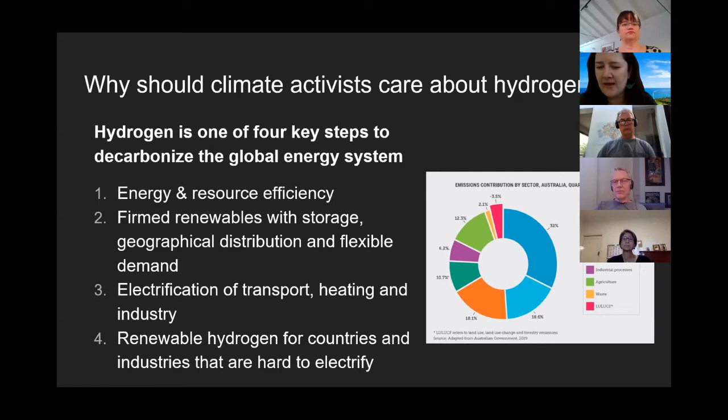For the countries and industries that are hard to electrify, renewable hydrogen is the thing that helps fill the gap, that gets us from anywhere between 60 to 85% renewable generation across total energy to 100% renewables across total energy, which we actually talk about as 700% renewables. I'll get to that. So how is hydrogen made? Hydrogen is made in 3 different ways.

The biggest way it's made globally at the moment is through a process called steam reforming of methane, which is where they take gas, fossil gas, and they run it through a chemical process and catalyzer, and out comes hydrogen. The second process is using coal and stripping hydrogen out of coal to create pure hydrogen.

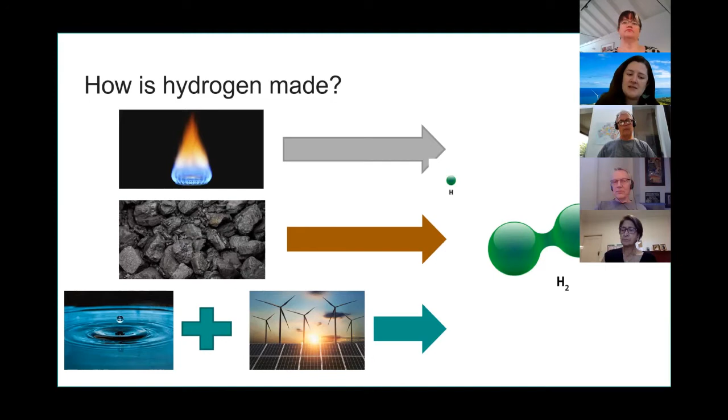And then the third type is renewable hydrogen. So using water and renewable electricity to split water into its constituent molecules, hydrogen and oxygen. And so the first 2 processes from coal and gas both produce greenhouse gas emissions, particularly carbon dioxide, in the process. So they are a polluting way of generating hydrogen. The electrolysis mechanism, which is where you use electricity to split water, if the electricity used is from renewable sources, is a 0 emission pathway to generate hydrogen.

So the thing to say about hydrogen is it's actually a very large global industry already. There's a lot of talk about how hydrogen is the big next thing. It's already a big existing thing. This is a report by Wood Mackenzie about a year ago, a global energy consulting firm.

And what it shows is that the global hydrogen industry that currently exists accounts for more carbon dioxide pollution than Germany, than the global shipping industry, than global aviation. So it's actually a big pollutant, and it accounts for about 1% of global greenhouse gas emissions. So only slightly less than Australia, in terms of our domestic emissions.

And what hydrogen is mainly used for at the moment is the synthesis of a chemical called ammonia, which is used in the production of fertilizer and explosives and a number of other processes and chemicals in the chemical industry. And in fact, ammonia is one of the top 10 most globally traded commodities worldwide. So it's actually a big industry. We just don't know very much about it because it's the feedstock industry rather than one that is a consumer facing industry.

Hydrogen is also used in the refining of oil. So we'll see the reduction in hydrogen use in that process as we start to electrify transport around the world and move away from petrol. And then it's also used in methanol production, which is, you know, if you have methylated spirits and you use that for cleaning your house or something like that. And there are a few other applications.

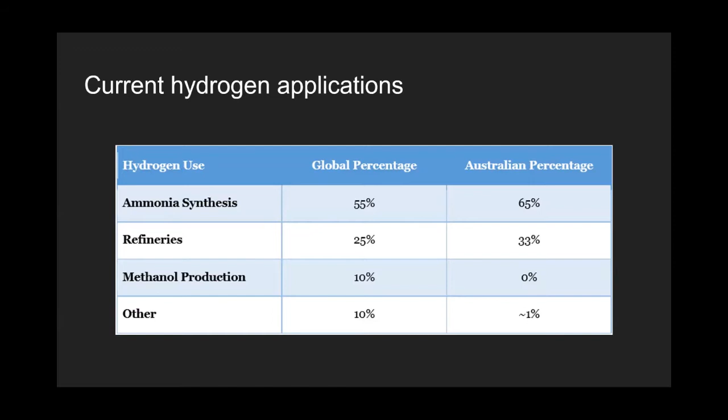So those are the existing applications of hydrogen that are happening worldwide and have been happening for decades, if not 100 years. But what are the potential applications of hydrogen? And this is where a lot of people get very excited, because hydrogen is quite a versatile potential fuel. Not only can it be used as a chemical feedstock to create ammonia, which is what it already is, it could potentially be used in heating processes.

It could be used for transport purposes, to power ships and trucks and trains, maybe even cars. It could be used as a form of storage that can be then burnt in converted gas peaking plant to help balance electricity when the wind isn't blowing and the sun isn't shining. We all know that we need storage, and it's essentially a form of storage.

And then, of course, it's an export opportunity for Australia. It could also be used in remote sites and a whole range of different applications. But I think one of the things that is important to note is that not all applications will be competitive from hydrogen. So currently, if I go back to this slide, steam reforming of methane, the gas pathway, is the most prevalent way we generate hydrogen globally. And at the moment, the renewable hydrogen pathway is a number of times more expensive than that gas pathway.

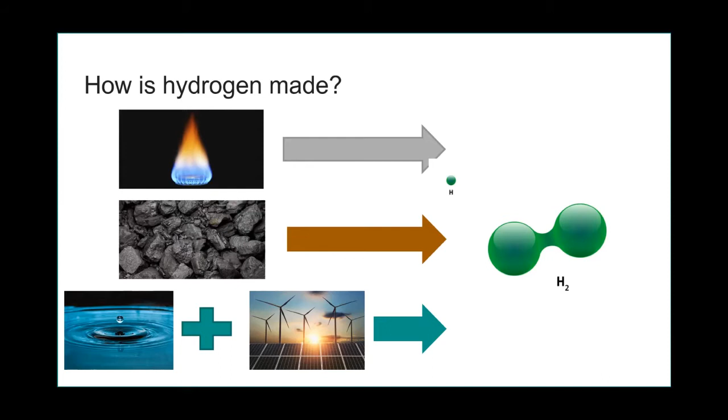So there are sort of two dimensions in which hydrogen is more nuanced than, say, transforming the electricity sector, where it's pretty easy. You go, we need to shut coal-fired power stations and replace them with renewables and storage. For hydrogen, you've got to first worry about how it's made, and then you need to think about, is hydrogen the most efficient application or solution to this particular decarbonisation challenge? So we've done some work evaluating the potential applications of hydrogen.

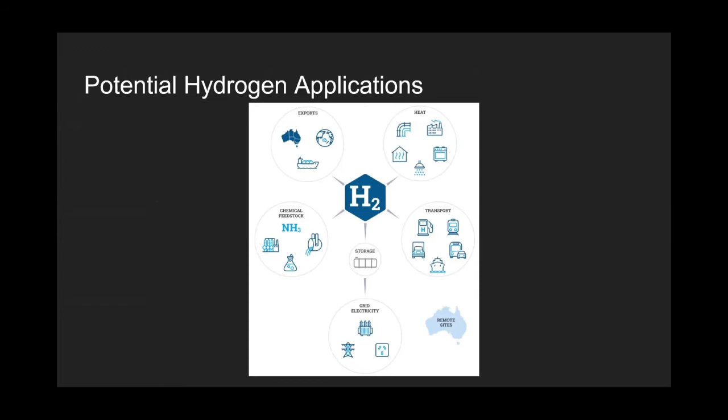And the questions that we ask: is the renewable hydrogen technology available for this use case soon? Or is it likely to be available in the long term? And that's really, does the technology for this sector exist? Does the technology to use hydrogen in ships, or export hydrogen, or use hydrogen in domestic appliances like your stovetop, does that technology exist now? And is it likely to exist in the future? That's the first question. It's a technical question. And then the second question, is an alternative zero carbon pathway likely to be more cost effective, functional and have less negative externalities?

So I'm just asking Nicky to unmute again. Hi everyone, sorry, my internet dropped out. Blame the NBN. Where did people hear up to? We probably only missed about 60 seconds. So if you go back to your share slides, we should be right. Okay.

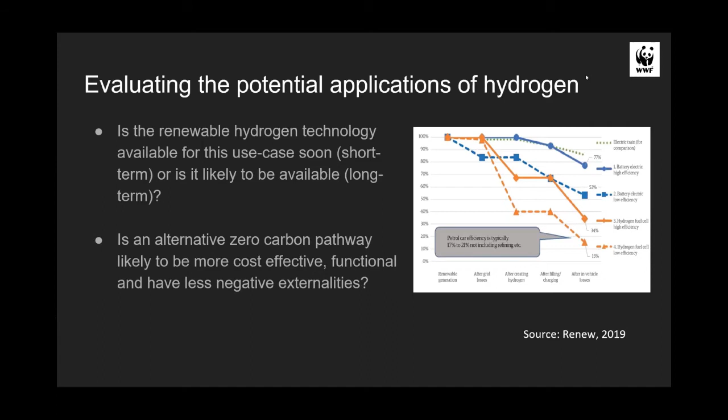So based on this analysis, we've identified 3 of the best long-term hydrogen opportunities and 3 of the best short-term hydrogen opportunities. So the first is in the production of green building materials.

So steel, for example, the steel production accounts for about 6 to 7% of global greenhouse gas emissions. And that's because in the making of steel, you use coking coal. And what we are seeing research and pilot projects show in places around the world is that you can replace coking coal with a hydrogen pathway. And so we're seeing some pilot projects in Sweden and in Germany.

And the question is, can Australia, as the world's leading exporter of iron ore, start to generate a green steel industry using our renewable hydrogen potential in Australia to generate and make green steel onshore? Similarly, alumina, so when we make aluminium, it's a 2-stage process. You refine bauxite, the raw mineral, into alumina, and then alumina into aluminium.

Now the aluminium path, the second part of that mainly uses electricity, and that's the part we know about. But the first part, we do some of that here in Australia, and that process requires very high temperature processes, and that will be quite difficult to electrify. And so renewable hydrogen could be a really good way of generating the heat that is needed to refine these metals and create these different green building materials.

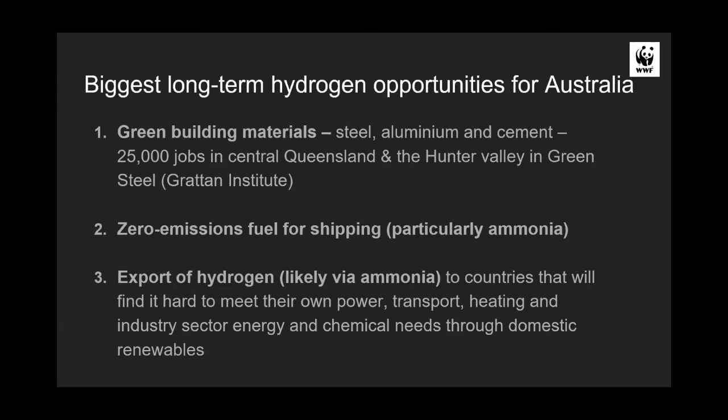But we're probably not going to see renewable hydrogen be cost competitive until 2030 or thereabouts, because we still need to bring the cost of both electrolyzers and renewables and electricity itself down the cost curve. Then the short-term market opportunities for us, they're really about how do you create the scale? How do you create the demand and the scale that will help bring renewable hydrogen down the cost curve and make it cost competitive?

So the first opportunity we see is through decarbonising the existing hydrogen applications, such as fertiliser and explosives. And one of the challenges here is there's quite a big cost differential for this application, but there is a big opportunity because the technology already exists. They already use hydrogen. It's not like they're converting from gas to hydrogen. They're just replacing one type of hydrogen with a zero emissions form of hydrogen.

The second is around heavy transport. We were talking to some financiers and they thought that there was quite a good opportunity to replace expensive diesel in remote mines and remote communities with renewable hydrogen, particularly where the renewables is excellent, which is in most of remote Australia.

And then the final area, and this is a little bit contentious, is around injection of hydrogen into the gas grid. Now, we don't want to see hydrogen used as an excuse to extend the life of the gas industry. So what we're saying is that we would only support this idea of injecting some renewable hydrogen into the gas grid if a state government was also pursuing significant electrification programs.

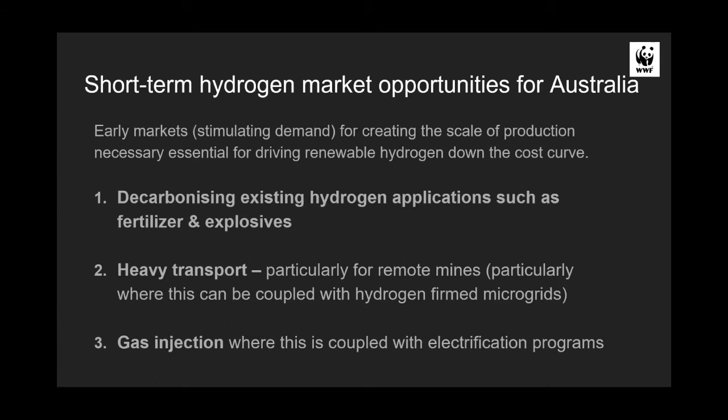Final few things that I want to say is, so let's talk about Australia's renewable advantage. We have some of the best renewable resources in the world. It's Australia, parts of Africa, Chile, and parts of the Western United States, where you have both amazing solar and wind resources, a bit of Western China as well. But we are one of the places that is, A, more accessible than some places, and B, we don't have a high population base and we have a large land mass.

So there is a huge opportunity that we can have to help decarbonise other countries. And if you look at Japan and South Korea, for example, which are two of our largest fossil fuel trading partners, they import the largest share of our coal and gas after China. They don't have a lot of land, they don't have a lot of sunshine, it's pretty mountainous, and they have large populations and large industry bases. They are literally going to need our help to decarbonise. And so hydrogen presents a really significant opportunity for those countries to decarbonise where they might have limited access to onshore renewable resources.

So that's why we at WWF are running a campaign to make Australia 700% renewables. And just to explain what we mean by that, 100% renewables is where we decarbonise and go to renewables for our existing electricity needs. 300% renewables is where we decarbonise our total domestic energy use. So gas for heating your home is converted to renewable electricity heating, and transport and industry as well. And then 300 to 700% is that export potential, the renewables we build to export.

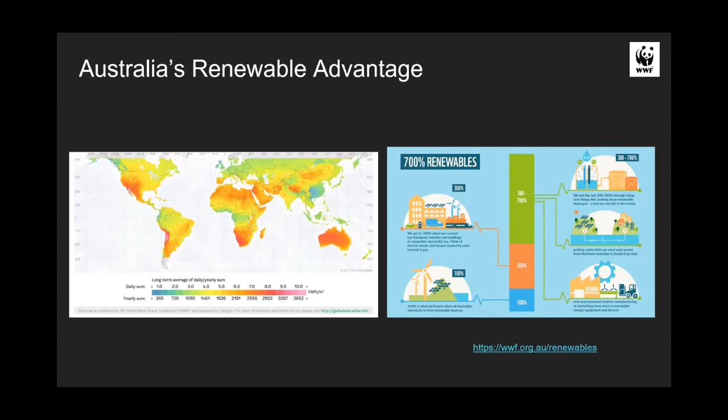And so the second to final thing I want to talk about is we see renewable hydrogen as a huge opportunity, but it is only one opportunity amongst many. When we talk at WWF around renewable exports, we talk about six types of renewable exports. Renewable hydrogen and its derivatives like ammonia is the first. But then there's the idea of undersea cables, like the Sun Cable project in the Northern Territory. The idea of onshoring manufacturing, such as green steel production, and the creation of renewable powered products, so embodied renewable energy in products that we then ship offshore.

And then there is the ecosystem that sits around the renewables industry. So our expertise, the components that we can make. We are the world's largest exporter of lithium, for example. Could we onshore and make batteries here in Australia? And finally, software and services. I won't go into that because I'm running out of time.

I'll finish up here, but we can talk. The thing that I don't have a slide for is the state of play. I'll run through that in a section. So WWF's position on hydrogen: we are very supportive of hydrogen and actively advocating for it, but we have some conditions on it. One is that it's renewable only. Two, that it's traceable, so we know its point of origin and can confirm it's renewable. That stringent public, worker and environmental safety practices are being adopted, because hydrogen is highly flammable and its derivatives like ammonia are environmental pollutants. So we need to be very careful.

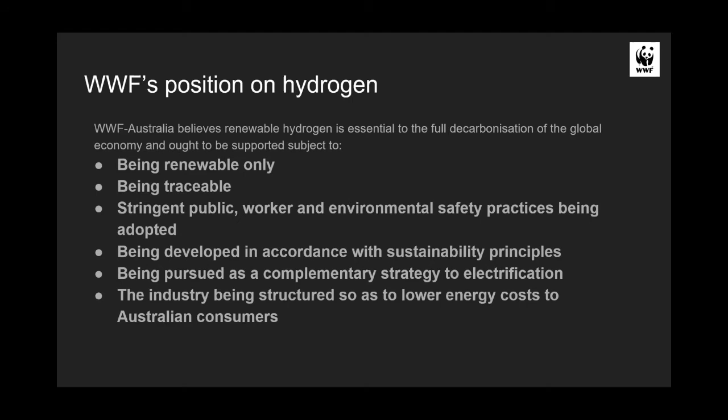I will just go into the state of play. I don't have a slide on it. The thing to say about renewable hydrogen is globally there's a land grab going on for it. We are seeing significant investments by Saudi Arabia, by China, by different places in Europe, Spain, Germany, the UK. There's stuff happening in the US. Japan is very interested in hydrogen, but mainly from an import perspective and a technology perspective, rather than generating it.

And then in Australia, we obviously have the National Hydrogen Strategy that was developed by Dr. Finkel, and then had the buy-in from all states and territories. But we are starting to see hydrogen programs in every state and territory. So it's one of the top 5 priorities in the federal government's technology roadmap. In Queensland, we now have a Minister for Energy, Renewables and Hydrogen and an Assistant Minister for Hydrogen.

The Greens and your local member, if you live in Balmain-Rozelle, Jamie Parker, has just helped secure in New South Wales a $50 million funding commitment from the New South Wales government to renewable hydrogen. The Victorian government has announced a $108 million program that will include renewable hydrogen. Tasmania has a $50 million renewable hydrogen program. South Australia, which was the first state to develop a hydrogen strategy, is very much in the demonstration process at the moment. And Western Australia has also got some hydrogen development programs going on.

And then, of course, there's the Asia Renewable Energy Hub, which will be the world's largest power station, the mega renewables project in northwest Western Australia, and that will include the export and use of significant renewable hydrogen capacity. So there is a lot happening in Australia, and that is exciting. But if we don't keep the momentum going and grow it substantially, then other places will outspend us, and that will more than compensate for the fact that we have some of the best renewable resources in the world, and thus some of the potentially cheapest renewable hydrogen in the world.